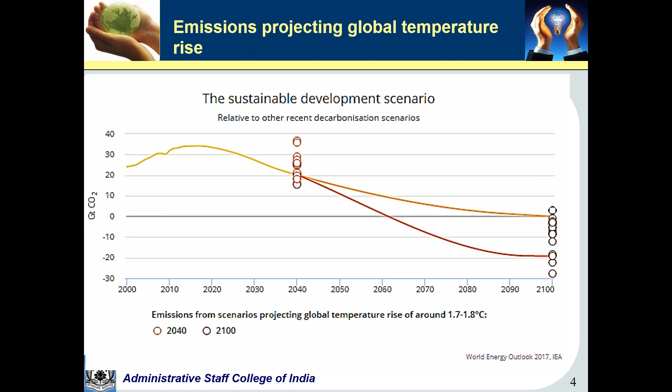The sustainable development scenario also suggests carbon dioxide emission reduction by 2090-2100, where all efforts and policies—whether industry, electricity distribution, power, or municipalities—must move in this direction. With this, if we think about Indian conditions, the energy saving potential in India is pretty high.

Only in the power sector, if we can bring electricity consumption down and implement energy efficiency, projections for 2031 say that 109 million tons of oil equivalent can be saved.

In the building sector—residential, lighting, commercial buildings, shops and malls, offices, hotels, and space conditioning at home—4.6 million tons of oil equivalent can be saved for space conditioning, hotels 2.6 million tons, offices 2.8, residential 10.1, and lighting 5.1. There is a huge potential where we can save energy in a very effective and big way.

The reason for energy efficiency in municipalities: in India, on average 4% of total electricity consumption comes from the municipal sector. Municipalities spend large amounts of their revenues on purchasing electricity for local public services like street lighting, water treatment, water supply, sewage pumping, buildings, and electrical distribution.

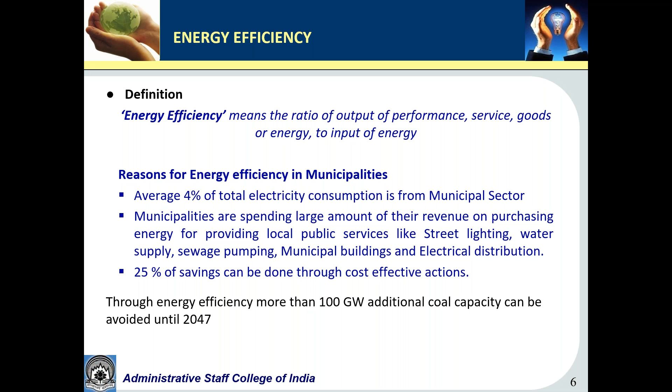25% of savings can be achieved through cost-effective actions if we implement efficient practices in all these sectors. Through energy efficiency, more than 100 gigawatts of additional coal capacity can be avoided until 2047—these are Indian projections.

Drilling down into where electricity consumption occurs in municipalities: public lighting around 1%, water works a major contribution at 3%, commercial buildings almost 8%, domestic/residential buildings 26%, irrigation 22%, and industry 36%. Out of this, 4% is municipal energy consumption.

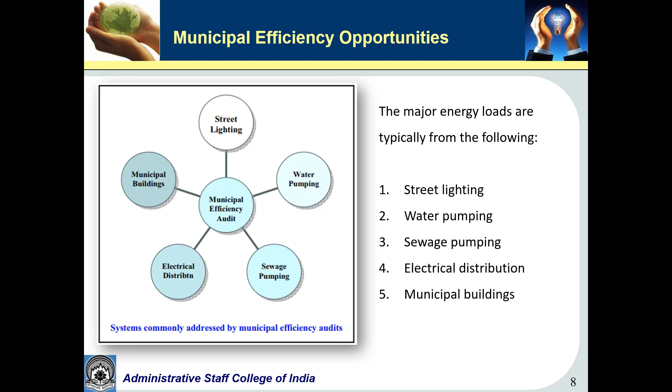We can identify the major areas where this load comes from, and the essential areas to focus energy efficiency on: street lighting, water pumping, sewage pumping, electrical distribution, and municipal buildings. India went ahead with this.

Looking at the reasons for energy efficiency projects in municipalities, India is plagued by high operating expenses in the supply of water—anywhere between 40 to 60% of energy costs arise only from supplying water. If we implement energy efficiency measures in pumping systems, we can save the 4,800 million units of electricity wasted every year due to inefficient water pumps.

Coming to the building sector, according to the McKinsey Global Report in 2010, 66% of the building stock by 2030 was yet to be constructed. In 9 years we achieved a lot of potential and constructed so many buildings, so the built-up area is coming up with most inefficient practices, like glass buildings.

Mostly people are using glass and not applying insulation properly, and because of this glass, buildings are becoming ovens, since most of India is in a hot and dry climate zone—except for a few northern areas—but most of the country is in this dry and composite or hot zone.

We are constructing these buildings with glass where the solar heat gain coefficient is also high, meaning the glass is inefficient—it gives visual light transmission as well as solar heat gain, turning these buildings into ovens.

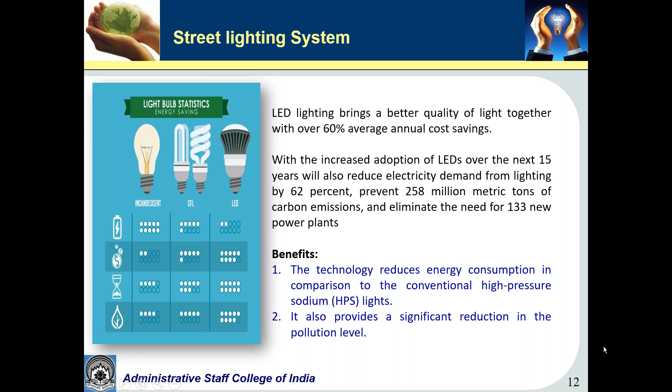It is not only about energy consumption and potential areas; when we talk about street lights, it is not just an energy inefficient equipment issue. It has to be designed in a very integrated approach way. Only LED street lights won't serve the purpose here.

Selection of energy inefficient equipment and poor designing practice of street lights are issues, because when switching to LED street lights from high pressure sodium vapor lamps or mercury lamps, your entire pole size and fixture size must be designed in a very different way, and those parameters must be specified in your RFP and specifications. That's how you design a very efficient street lighting system rather than an inefficient one.

We have observed in our experience that a few municipalities and urban local bodies just went ahead and replaced the existing conventional street lighting system with just an LED system. It gives very bad results because the lux level and the angle of that particular LED fixture don't come onto the road, and the lux level measured at the road afterward was very less.

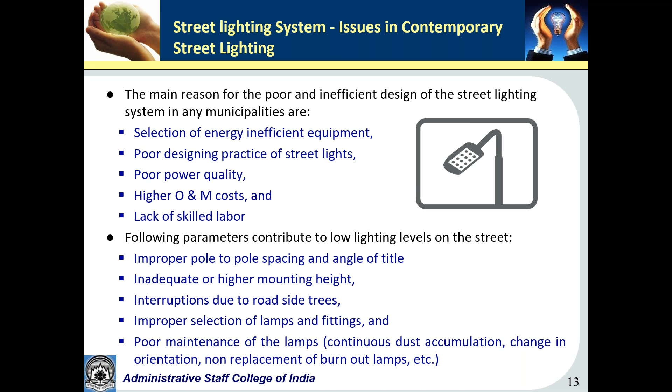Now we have a very good example of Baroda city's lighting and non-lighting design-based lighting system, where 300% improvement in service delivery happened, because energy conservation is one aspect, but service delivery is another aspect in municipalities that always has to be thought about. When we integrate energy efficiency with service delivery, that gives tremendously good results.

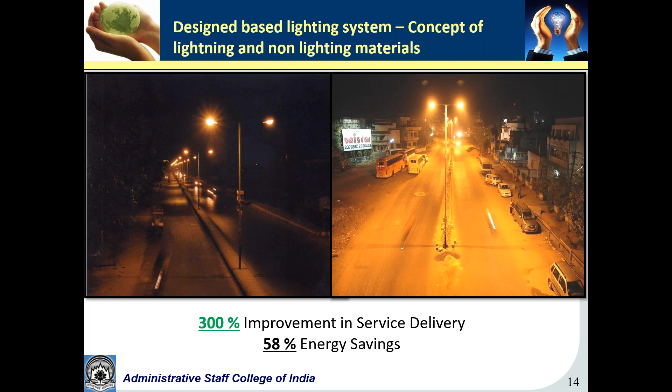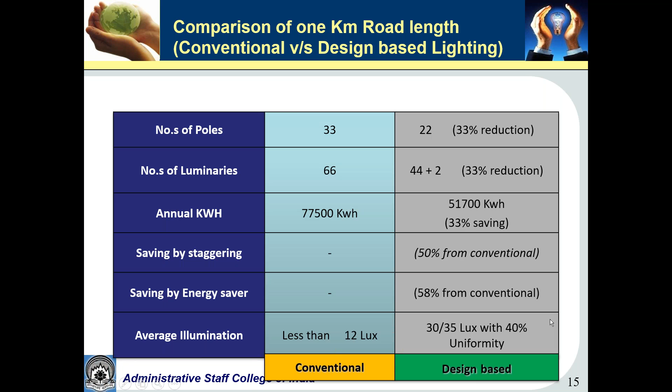So 300% improvement in service delivery happened, and 58% energy savings were observed in Baroda city. In the earlier lighting system, darkness between the two poles was clearly observed; now the street is very well lit, and even extra light pollution is not there. These kinds of achievements can be realized with energy efficient systems. Average illumination was 30 to 35 lux with 40% uniformity, and 58% savings were achieved, with 33% savings achieved overall.

With this particular LED street lighting and energy saving under the SLNP program, Uttar Pradesh's total LED street lights installed saved more than 30.02 million units, with 50 lakh street lights installed in over 500 cities in India, leading to 135 crore units and 742 crore rupees saved every year. It is aiming to replace all 1.34 crore conventional street lights, with 15 lakh tons of carbon dioxide emission reduction.

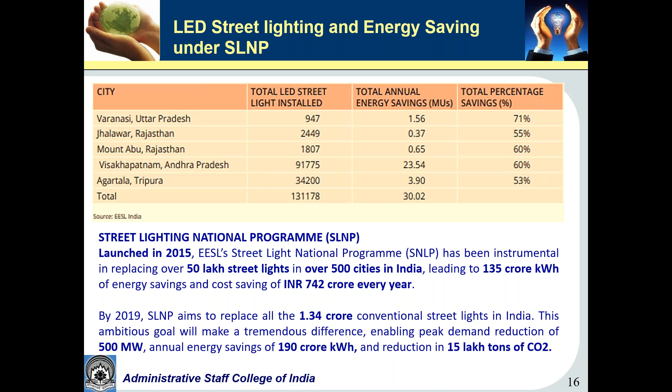190 crore units can be saved with this program. So that is the really big target and challenge, but people are accepting it because it gives them service delivery benefit, lighting benefit, as well as financial benefits and strengthens the ULBs, which are coming forward. Energy Efficiency Services Limited is working with ULBs in a very effective way.

Coming to water and sewage pumping systems, there is 2.57% relative to total energy consumption by all sectors, with more than 20,000 million units saving potential. Effective ways include proper maintenance, monitoring, controls, reduction of demand, more efficient pumps, proper pump sizing, and multiple pumps for varying loads.

What we observed in our day-to-day working in India is that most of the pumps are old, and whenever you repair or maintain these pumps, certain inefficiency gets added. So pump repairing affects the entire operation of pumping and brings a lot of inefficiency into the system. Replacing pumps with super efficient pumps and maintaining them properly is needed, and the skills of maintenance people need to be developed so that whenever maintenance and repair happens, the inefficiency must not come in.

So it is not just about replacing the pumping system, it is an overall integrated system where we need to think, and then real energy efficiency in a sustainable way can be achieved in the pumping and sewage treatment system.

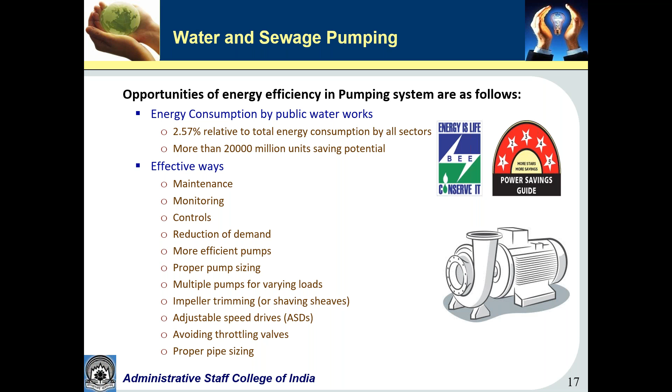Coming to the building sector, as I mentioned, by 2030 almost 66% of the building stock is yet to be constructed. So India went ahead with the Energy Conservation Building Code to construct buildings according to certain codes, where we can save energy at the design stage itself.

1930 million square meters is the current building stock, and 66% of that is yet to be built. So it was a great opportunity to go into this building sector and convince government buildings as well as the real estate developer community to save energy at the design stage itself.

The Energy Conservation Building Code was brought by the Bureau of Energy Efficiency in 2007 and 2008, which talks about minimum energy efficiency standards for design and construction of commercial buildings. It is only for commercial buildings because the Energy Conservation Act says the Energy Conservation Building Code must be applicable to all commercial buildings on a mandatory basis.

Recently, Bureau of Energy Efficiency modified the Energy Conservation Building Code, and now it is Energy Conservation Building Code 2017. But when we started, it encouraged energy efficient design of new buildings and major renovations, meaning both retrofits as well as new buildings.

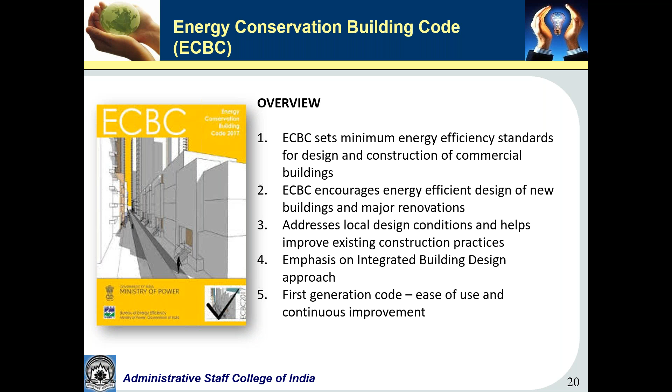This code talks about local design conditions and helps improve existing construction practices, and it emphasizes an integrated building design approach, because when you construct a building, you have to integrate construction practices, material procurement and sourcing, as well as designs, HVAC designs, and the use of that building. When you integrate all these things at the design stage, that design will give you more efficiency rather than just a prescriptive approach.

It talks about building envelope, heating, ventilation and air conditioning systems, lighting systems, electric power, pumps, and solar water and pumping systems.

It gives you prescriptive approach, compliance approach, and whole building performance approach. Prescriptive approach means, if I take an example of envelope, the code gives you certain kind of specifications: glass must have this particular solar heat gain coefficient or visual light transmission, over and above it won't allow. Roof resistance must be this much. Window to wall ratio, this much is allowed, more than that is not allowed. If you follow these kind of specifications, that is called prescriptive approach.

But there are many simulation techniques available where you can combine all those parameters and design your building accordingly. That is called whole building performance approach, which is more flexible, and you can trade off. 5-star hotels may like to put more designer lights in their lobby, which are sometimes inefficient lighting systems, but they can trade off with wall insulation, roof insulation and glass usage. So whole building performance gives you flexibility, whereas the prescriptive compliance approach won't give you that kind of flexibility. So these are the approaches.

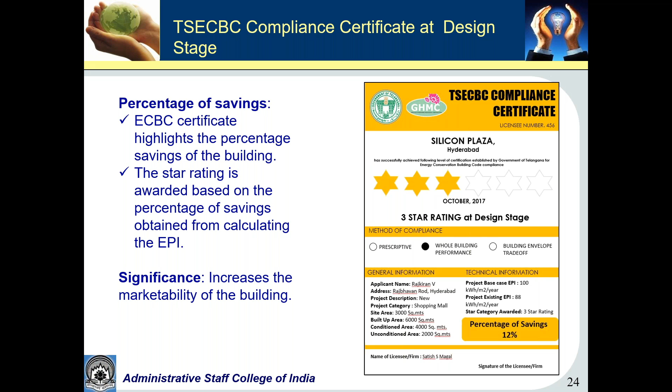And at occupancy stage also, we issue these certificates and then we check whether 12% savings are achieved according to the design stage or not. And I can tell you here that the IKEA building, which is the first IKEA store in India, in Hyderabad, got the first occupancy stage certificate also in Hyderabad.

So it is now a full-fledged system, and we are trying to improve this system with a certain kind of energy passport system where buildings can showcase in the next 3 years post construction that they are saving energy according to the energy savings submitted to the urban local body at design stage as well as at occupancy stage. So based on that, their market value, lease value, rental value and sale value can also be linked in future. And that's how real estate developers as well as customers are coming forward to adopt this system in a very effective and efficient way.

This is the Greater Hyderabad Municipal Corporation website, where they put all kinds of information on the energy conservation building code and energy. So urban local bodies are now coming forward for these new innovative systems of energy conservation, where they need not incur money, they have to support the system. Government has already said that we are not going to give property tax incentives or other incentive systems, because energy conservation in buildings itself gives certain benefits to the consumers as well as the people who are staying in or using that building.

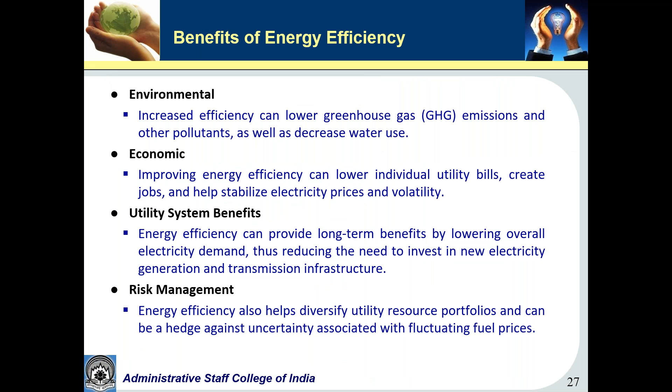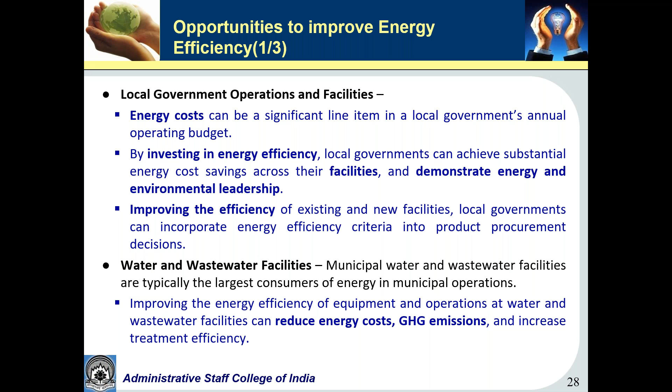So as I mentioned, with all these things, there are environmental benefits, economic benefits, utility system benefits, and risk management can happen. We have an opportunity on energy costs by investing in energy efficiency. Local governments can achieve substantial energy cost savings across their facilities, improving the efficiency of existing and new facilities. Local governments can incorporate energy efficiency criteria into product procurement decisions. Water and wastewater facilities can put these kinds of energy efficiency systems. Government buildings are very important places where we can actually demonstrate.

And now the government declared that in Telangana and even in Maharashtra, one of the states in India, 1,000 old buildings are going for retrofit to save more and more energy. So not only new buildings, but old buildings also, people are coming forward for retrofit, and those will be the demonstration projects where other people can come forward to do this.

And one more program, which I didn't share in the presentation, but I want to share with you. Recently, we have launched the cool roofs program, because of the emissivity of white roofs, which is a very prevalent, ancient practice in northern and western India, with mosaic tiles on the roof that reflect the heat. And with new construction practices, somehow we are not constructing our roofs according to these cool roof practices. Now we are encouraging it in all municipalities.

This is one case of disaster management for heat waves and reducing the urban heat island effect, as well as saving energy, because we have experimented in a few of the slums in Hyderabad, and that gave very good results: a 2 to 3 degrees centigrade reduction in ambient temperature inside the house, which also reduces your fan load as well as your HVAC load.

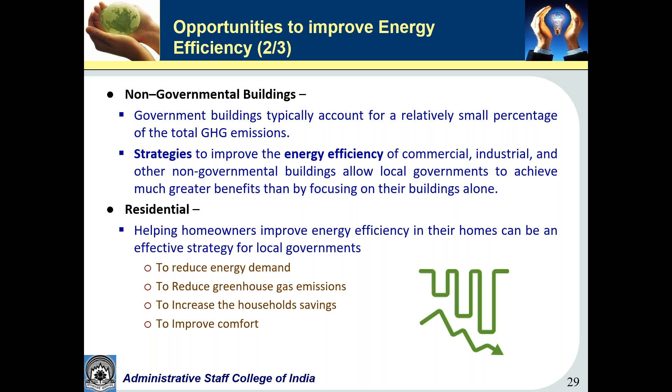So residential buildings are also a huge load. The energy conservation building code is applicable to commercial buildings, but the Bureau of Energy Efficiency brought up a residential building code also. As of now we are not making it mandatory, but we are implementing residential building codes also. So with this, I think these are the steps for developing municipal energy efficiency projects. Other panelists are also going to talk on this, so everyone knows about this.

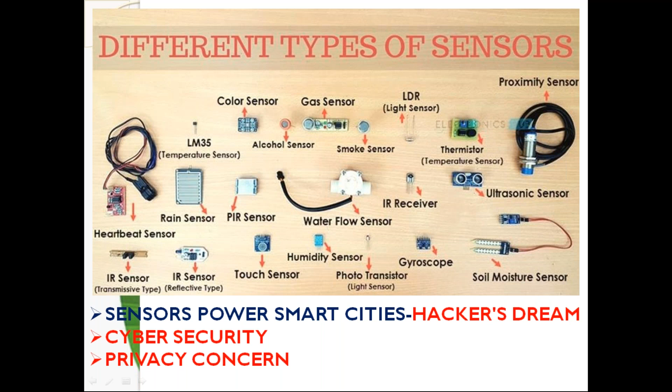You need to be smart to what level? In SAARC countries, India is really coming up. They have taken up a target of more than 100 cities to be developed as smart cities. China is doing excellent. I will say that they have got smart shopping malls. I will show a small video. In a shopping mall, the main hassle is payment. You buy a lot of things, and then you find a big queue.

So they have developed that the moment you enter the shopping mall, you just punch your credit card and it is taken, and you buy everything and you come out. And it is so scientific that it is also theft proof. So your time is saved, and again, the time of the store management is also saved.

They have gone to such a level that through your retina scanner, the moment you enter the shopping mall, you don't even need to punch your card. You buy the things and you come out, and in your smartphone you will find that whatever you have purchased has been debited. I would just like to show a part of a video on it.

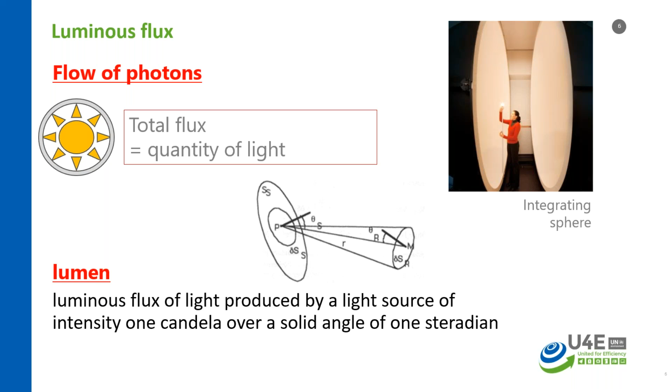Next, illumination - very important for street lighting, because often we talk about illumination on the pavement. This is normative most of the time. It's measured in lux. 1 lux is the flux of 1 lumen arriving on 1 square meter - the quantity of light on a surface per square meter. This is lux, and it's quite easy to measure compared to flux. You measure lux with a lux meter.

That's why most of the time we talk about the quantity of light on the pavement in terms of lux - for example, if you want to light a typical road, you have to put 15 lux, let's say. You don't talk about lumens. So, next slide - after this I think we're nearly finished with the physics, so it's quite easy.

The color temperature is the color of the light, let's say. We won't go into details about how we found it - this is a black body curve. A black body emits one particular maximum wavelength, depending only on the temperature.

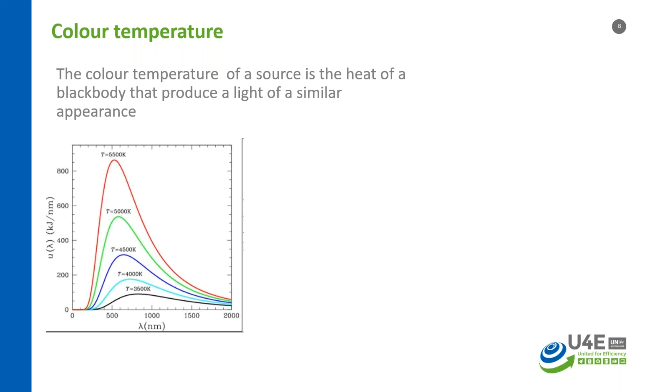We talk about color temperature mostly for white light, but it goes from red to blue or white-blue light, and this is how color looks. So you have all kinds of color temperature for different light sources. When it's a red or blue light source, you can't really talk about color temperature, but usually for light used for lighting humans, the street, or indoors, we can talk about color temperature.

We'll see an example later. The color rendering index is also an important parameter, the last but not least. This is the ability of a light source to keep the real color of an object, meaning the color you would see during the day with sunlight. It ranges from 0 to 100. At 0 you cannot see any color, at 100 you can distinguish all colors.

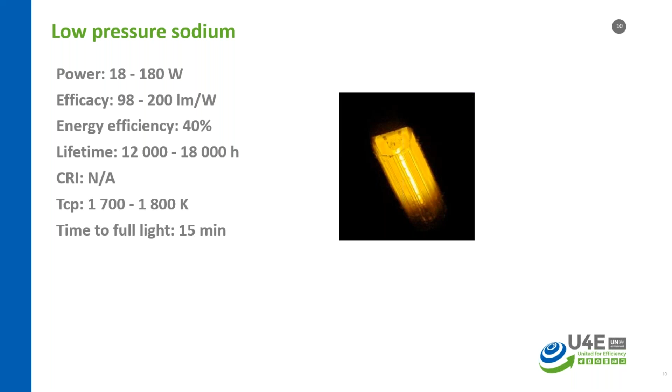It can reach 131 lumen per watt. The color rendering index is not so good, but it's usable. The color temperature is quite low, 2150 Kelvin, because it's yellow. And the lifetime is quite good. So this is a very common light, and it's quite efficient. But we have better options now, and it's also good for smart city applications.

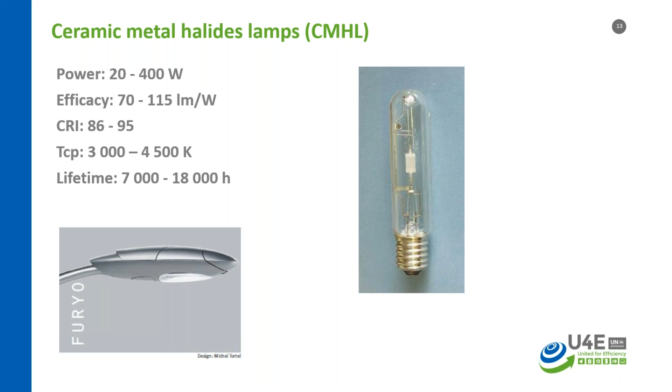Next is high pressure mercury lamps. I don't know about your country, but in Europe it's now banned - you're not allowed to put high pressure mercury lamps on the market. Why? Because it's not efficient. The maximum is 50 lumens per watt compared to 130 something for high pressure sodium lamps, so it's less than half the efficacy. It's not so good. The color rendering index isn't that bad, but it's not efficient, and it contains a lot of mercury. We will see more on this later. All the lamps we've discussed are discharge lamps and contain mercury.

You cannot imagine a commonly used discharge lamp, not in the laboratory of course, without mercury. And mercury is harmful. I checked, and some of your countries did sign protocols to get rid of mercury and to recycle it, so this is an important parameter to consider.

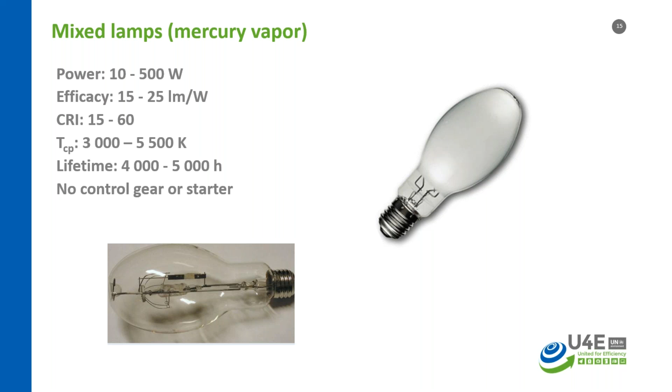You also have mixed lamps, I guess you don't use them. It's an old lamp, not efficient at all, mixing between incandescent and high pressure mercury lamps. I don't want to talk too much about it, except if you have questions.

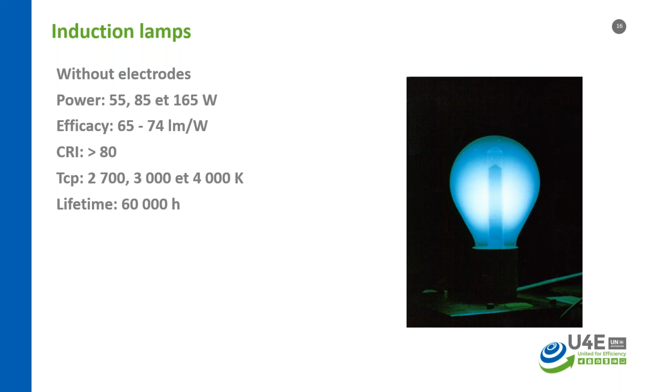You have induction lamps also. You can find a lot in your country, actually in Asia. This is a lamp without an electrode - you have an antenna in the center, you can see it on the picture, and then you create a magnetic field, so electrons are turning and emitting light. I won't go into details, but it's quite efficient with a very good lifetime, 60,000 hours, very good because you don't have an electrode, but not that efficient actually. Still, a good competitor compared to LED.

LED is, we think, the future for all kinds of lighting. A few years ago I wouldn't have said that - I would have said LED are good for domestic lighting, indoor lighting, but not for high power, not for street lighting, because we weren't efficient at dissipating the heat of LED. But now LED are ready for all kinds of application, and we see that.

The power can range from 20 to 100 watts and even more. The efficacy depends a lot on the luminaire, but it's common to find efficacy higher than 100 lumens per watt. A good color rendering index, 70 is the lowest, but you can actually reach 90. The color temperature can range from red to blue, so you can choose your color, and the lifetime ranges from 20,000 to 100,000 hours. This is a very interesting light source.

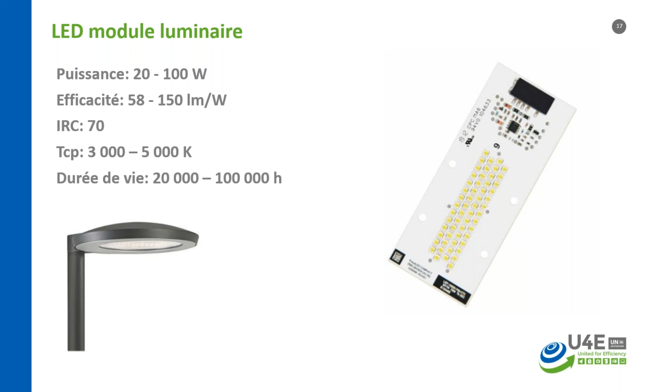Low pressure sodium emits deep yellow light. It's most used for tunnels, industrial platforms, and so on. It's quite efficient, but for 32,000 lumens - if you have a lower need, it's not that efficient. The maximum efficacy is for a certain quantity of light, that's the issue.

That means high pressure sodium, it's clear yellow, very efficient at 130 lumens per watt, but for 33,000 lumens. This is for roadway lighting, for luminaires higher than 8 meters. This is quite a high quantity of light, so it's good for a luminaire that is quite high.

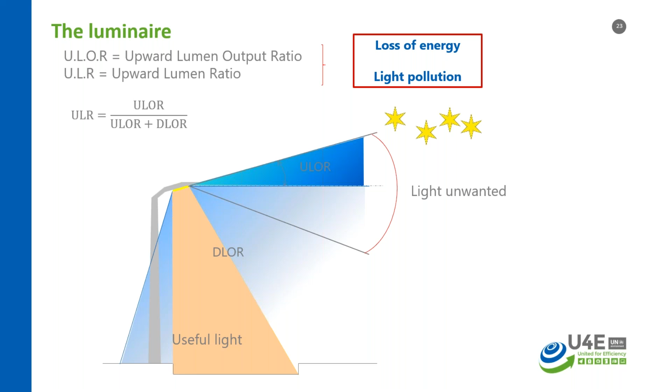So one simple parameter to limit light pollution is to say, okay, we want a luminaire with an upward lumen output ratio of 0%. Now we can do it. A few years ago, it was quite impossible because you tilt the luminaire to light the whole street and so on. But now it's possible. So this is one advice: please, when you buy a luminaire, whatever it is made for, please buy ULOR 0%.

Think about this, this is smart lighting already: dimming and presence detector. Think about it. Dimming is when you reduce the quantity of light during the night, because the need on a road is changing during the night. For example, in a commercial area at 7 p.m., you have a lot of people. And so you need a lot of light for security reasons and because there are people.

But at, let's say, midnight, you have nobody in that area. All shops are closed and you have nobody. So you need less light. Here it's at 11 p.m. You need less light. And once again, when shops are opening at 6 or 7, let's say, you need light again until the sun is shining.

So this is dimming. You can take into account the needs of people, the needs of light on a particular street, which are changing during the night with dimming. And with dimming, it's quite simple to dim a luminaire. You have a simple tool to do it. I don't have time to go into detail, but you can save, let's say, 23% in that particular example.

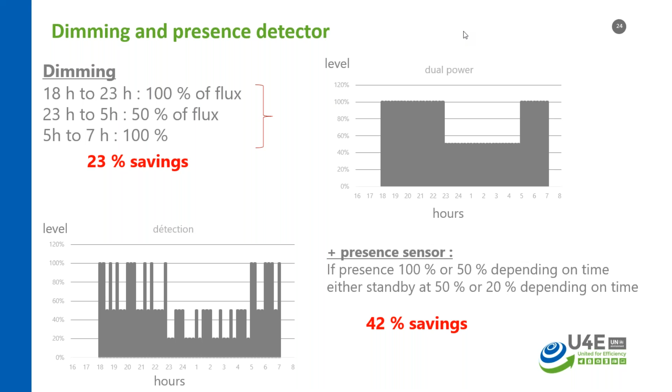So now I wanted to talk about off-grid street lighting. I think it's very useful, even if we talk about smart cities and big cities. Off-grid street lighting can be used everywhere now, even if you have the grid, because most of the time the grid, the electrical network, is not in good shape, and you can have, for example, flooding, and you have to do work on the grid.

It costs a lot to maintain a good electrical grid only for street lighting. When you use it for other purposes, okay, you use it. But most of the time in some cities, it's only used for street lighting. And if you don't have a good grid, you must think about off-grid street lighting.

Here, I won't go into detail, but you have a complete comprehensive guide which was produced by the International Solar Alliance, which is an international initiative. At the beginning, it was between France and India, but now a lot of countries have joined. So you have the quality, how you should think about an off-grid street lighting project, how you should go for, let's say, financial setup, your design, implementation, how you should consult people, engage different stakeholders, engage the community, and so on.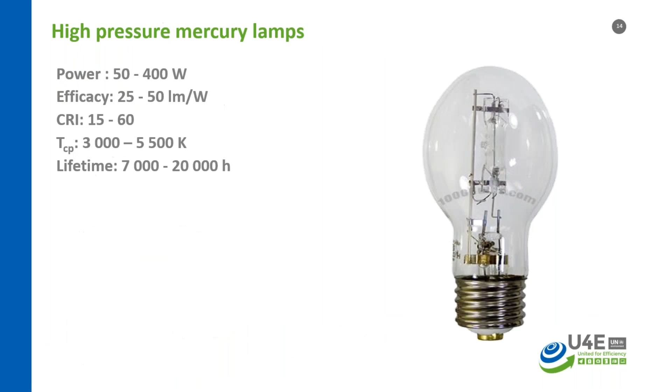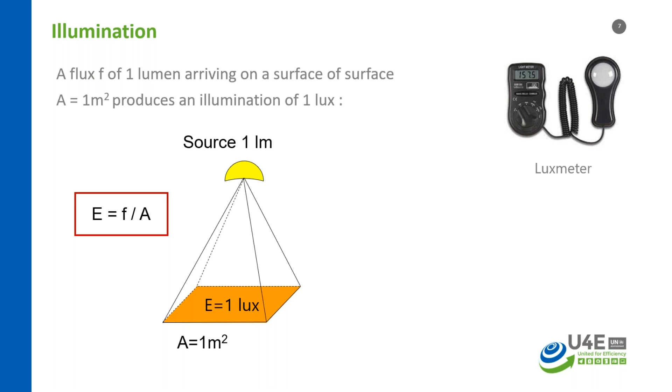Okay, so this is normally normative. You can see a lot of norms that talk about the illuminance level that you have to put on places. Uniformity: you can have a dark spot in the middle between poles, and it's measured by uniformity of light. Uniformity is the minimum illuminance divided by the average illuminance between those two poles, and it must be higher. Sorry, I didn't put the sign, higher than 0.4 to have a good illumination of your street.

Duration of light at full power. This is normally the advice before dimming or presence detector. Minimum level of light when dimming. You can do dimming everywhere, but you have to maintain a minimum level of light, especially for main roads. It's important to maintain a minimum level. Light control: for main roads, you control all luminaires together. You can have a remote control for the light, and you control all luminaires on the same road. So people are not disturbed by a different level of light depending on the luminaire.

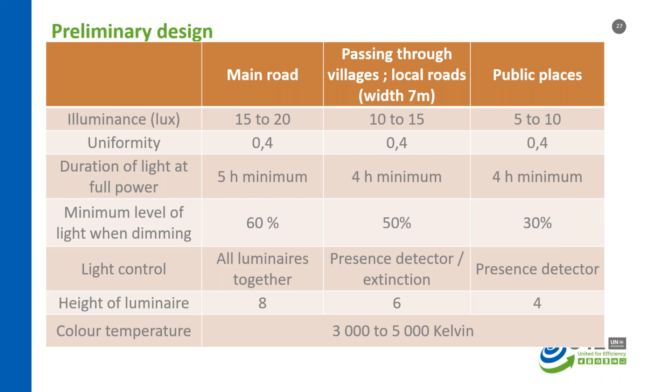Quality criteria of your system, because a solar lighting system is quite a complex system. You have a photovoltaic panel, you have a battery, you have a detector, and you have your luminaire by itself. So we designed, with some people and some experience, quite easy criteria to check. The first one is the power of the modules in your photovoltaic module in watt peak divided by the power of the luminaire must be higher than, let's say, 2 or 3. This is a ratio that you can easily check. The power of your solar panel divided by the power of your light source must be higher than 3, let's say.

Second one, the power of your solar panel divided by your daily reference consumption. I mean, if you light, for example, 5 hours with 20 watts, it's 5 multiplied by 20, 100 watt hours. Okay, so your module power divided by your reference consumption must be higher than 0.5, 0.6.

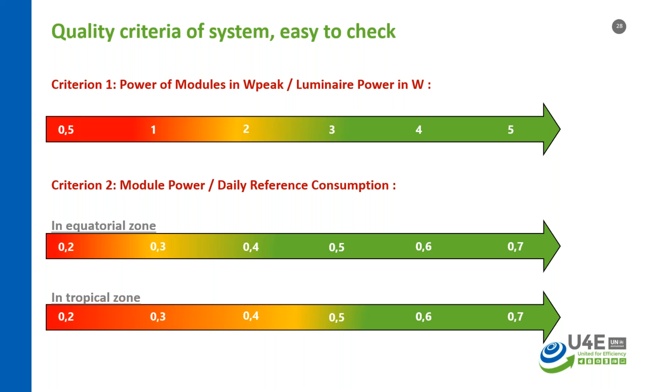Also for solar lighting, take care of batteries, battery technology. There are 3 kinds of batteries that I used. Lithium ion, that is very common for cell phones or whatever.

Nickel and NiMH, I don't remember how you call it in English, but this is nickel batteries, let's say, and lead batteries. Of course, lead is very attractive because lead batteries are quite cheap compared to other kinds of batteries. But if you consider the total cost of ownership, you can use only 10%, let's say, of a lead battery.

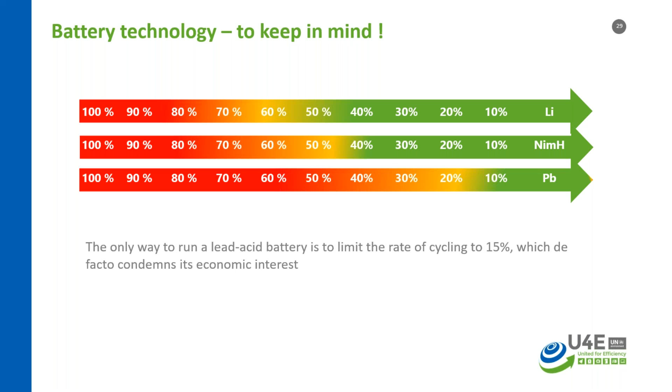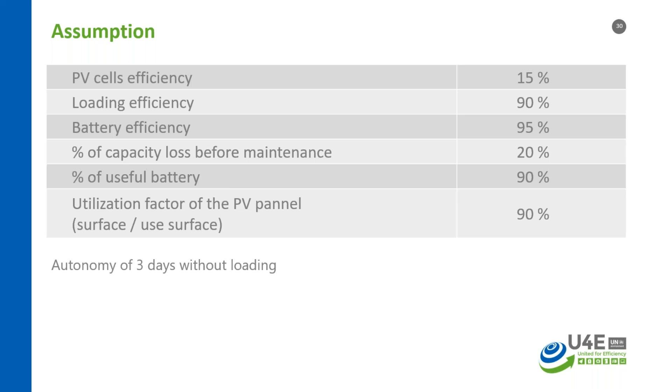So next slide, sorry. Here I will show you a decision tool for solar street lighting that you can use. So I took some assumptions. I don't want to go into details, but here are design tools. So this is for a particular irradiation in watt hours per square meter per day. And it's something that we can discuss later, but depending on the area you want to light, the power and so on, you have the surface of the solar panel, the capacity of the battery you should put, and so on. So this is a complete design tool.

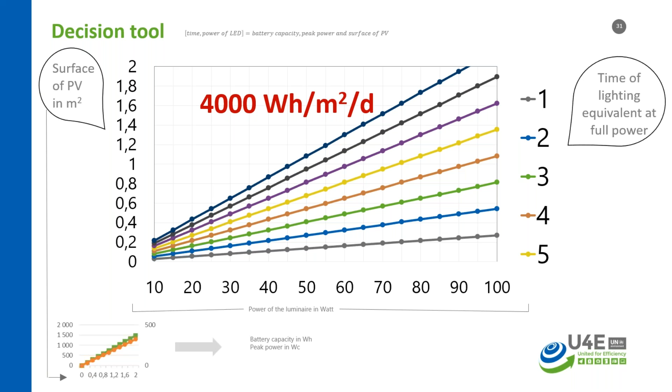A comprehensive approach, last slide. For street lighting, you have to do a pre-diagnostic to assess your needs and your possible savings. Then you decide, is it worth going for a real diagnostic with engineers and so on, because it can cost a lot, but most of the time it's worth it. So you go for an operational and technical assessment, planning, budget.

Very important: use the new tools of today. The presenter before me was talking about it. You use your computer basically, and your geographical information system, so you can remotely control the lights in your city. Financing is important, with energy performance contracts, which are quite efficient contracts.

Works, and sustainability. This is the last point, but think about maintenance and anticipate your budget for maintenance when you have to change the light, or even when you have to clean your luminaire. So thank you, it was a very quick overview of street lighting.